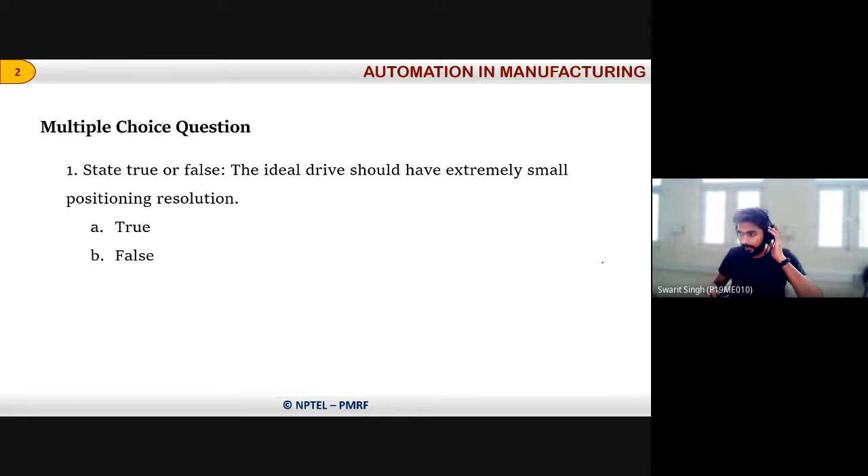Question answer round. The first question is on your screen now. It is a true or false statement. You have to decide whether the statement is true or false. The statement is: the ideal drive should have extremely small positioning resolution. Is it true or false? We are talking about an ideal drive. So what is required for an ideal drive? Should it have extremely small positioning resolution or a high positioning resolution?

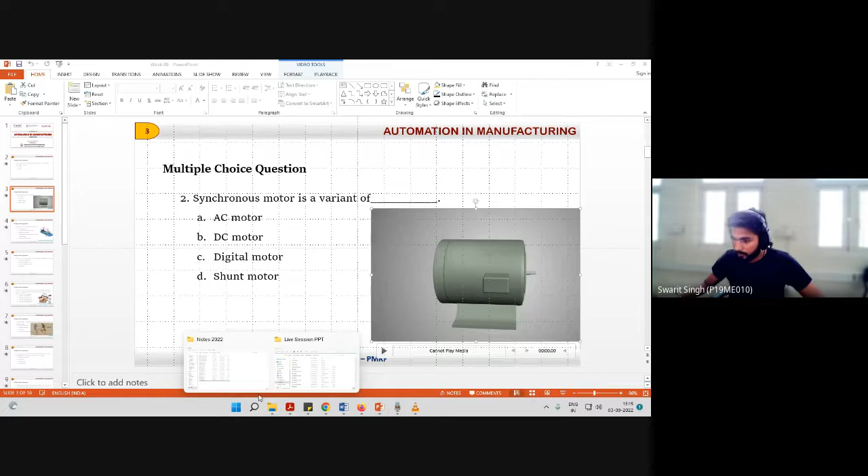Excuse me, just let me play this. Maybe it is not getting played. Just give me a second, because I have presented Windows, I think that's why it was not able to play that. I'm presenting the whole screen now. I hope my screen is visible to you all. Okay, come to it. Cannot play media. Okay, so let me show you the video directly. I'm sorry for this mismatch, I just tested it, it was working, but it's now not working.

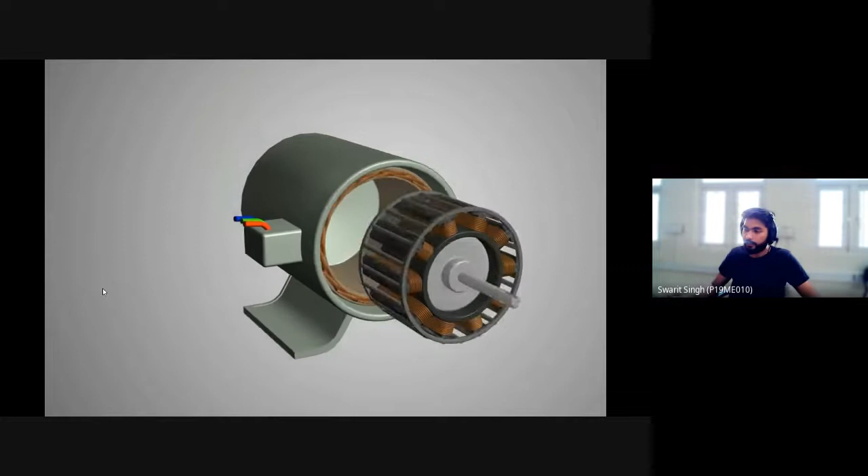Okay, so here it is showing how this synchronous motor has been built. As you already know, there is a stator and a rotor. The outer part is the stator, and inside it the rotor is fixed, placed there.

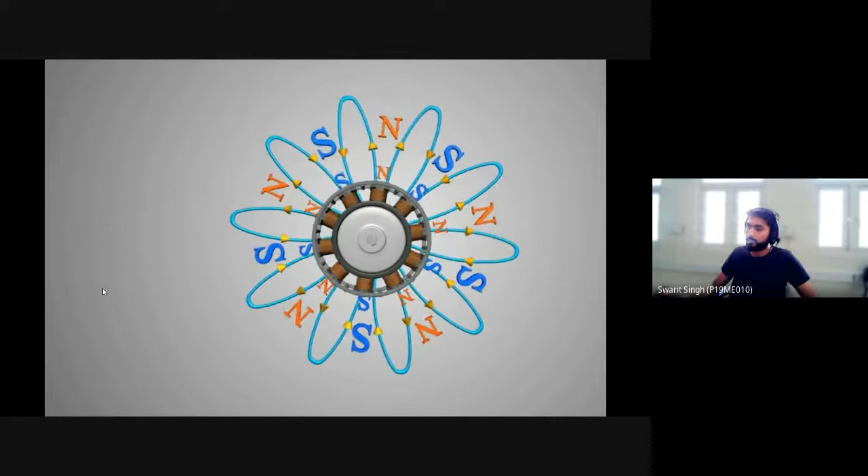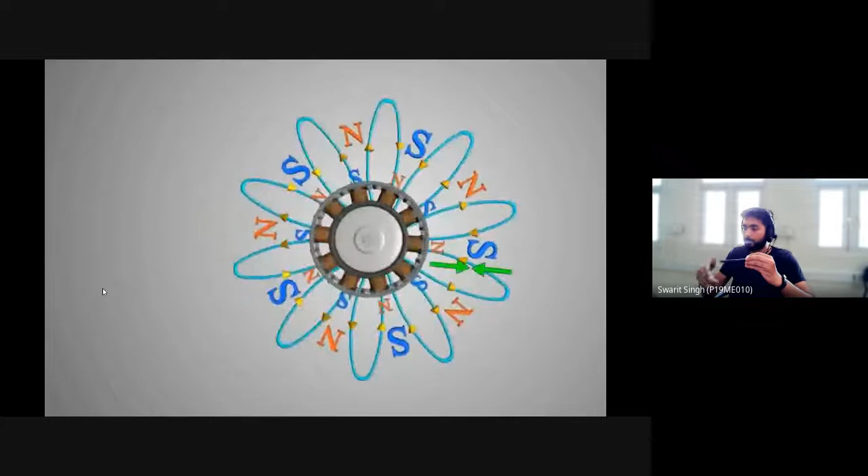So with the generation of this magnetic field, once both the north and south poles get in a synchronous mode, the rotation of the rotor will be in synchronization with the field generated by the stator.

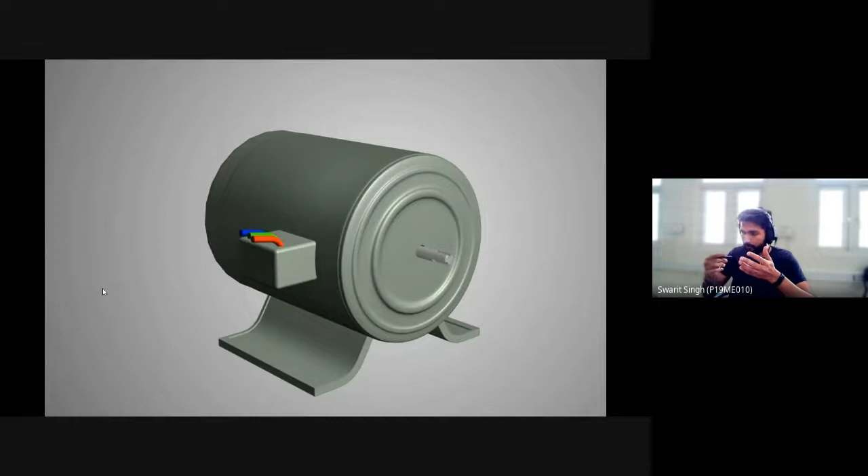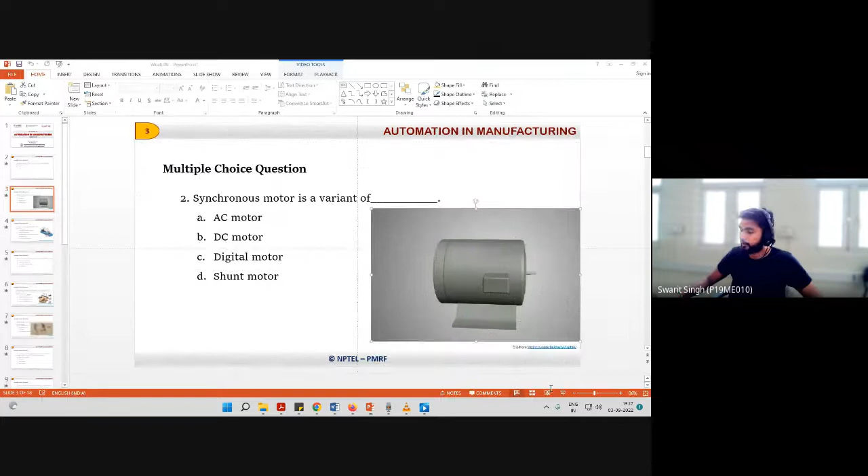So this is why this kind of AC motor we call a synchronous motor, because the frequency of rotation of the rotor of this synchronous motor is in sync with the frequency of the applied current, and the magnetic field that is generated in the stator.

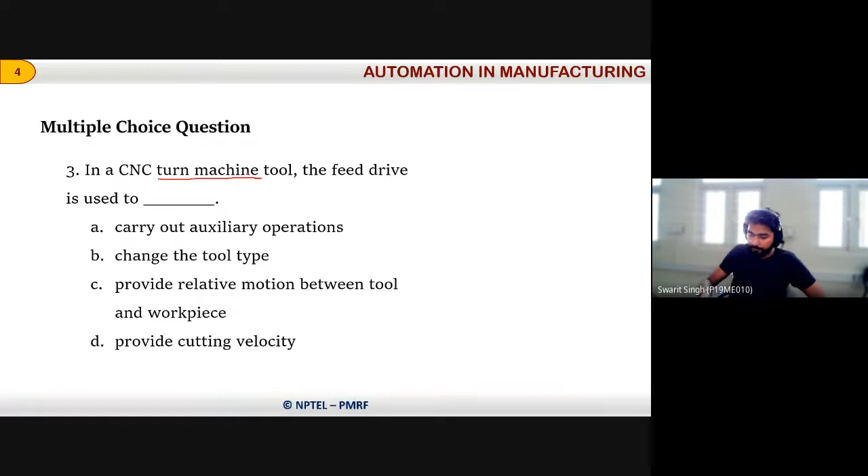So Chandar, Mukut, and T. Shankar Lal say C is the answer. Okay, so yes, C is the answer, because this feed drive is used for providing the relative motion between the tool and the workpiece.

As you all know, in a CNC lathe or any lathe, the lathe is meant mainly for turning operations, where the workpiece is fixed in the chuck or spindle of the lathe machine, and it is rotating on its axis. This workpiece keeps rotating, and the tool is mounted on the feed drive, which keeps moving, with movement defined by the operator manually or through code. That movement provides the relative motion between tool and workpiece, and due to that motion the cutting action is performed. So for that purpose this feed drive is used.

So you can see a sketch of a feed drive. There is a drive where the motor is placed, and a screw-nut-ball arrangement is there. This screw is attached with the shaft of the motor, so once the motor rotates, this also keeps rotating, because there is a teeth, a helix, so it keeps rotating, and then this nut, just like a simple screw and nut arrangement.

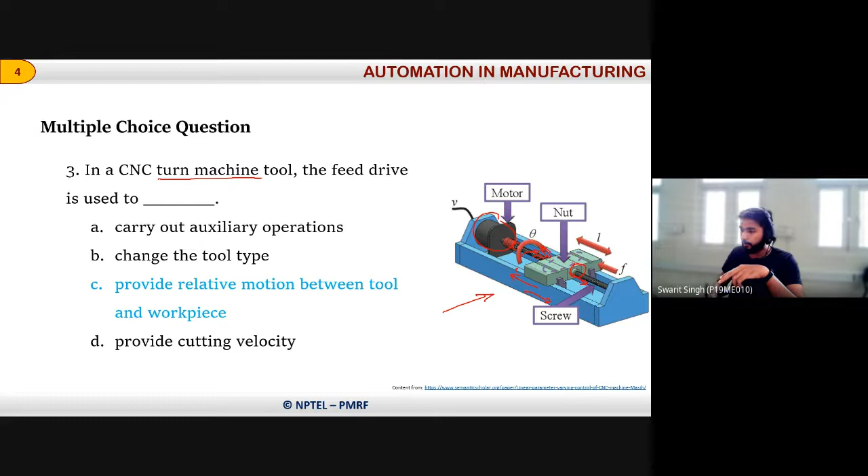Because of that rotation, inside this the rotation of this screw, the nut keeps moving either in this direction or in that direction, depending upon the direction of rotation of the screw. That provides the motion to the tool either in this direction or that direction. Or if we align this axis, like rotate it by 90 degrees, it will provide motion to the tool in this direction. So this feed drive is used for providing the relative motion between the workpiece and the tool.

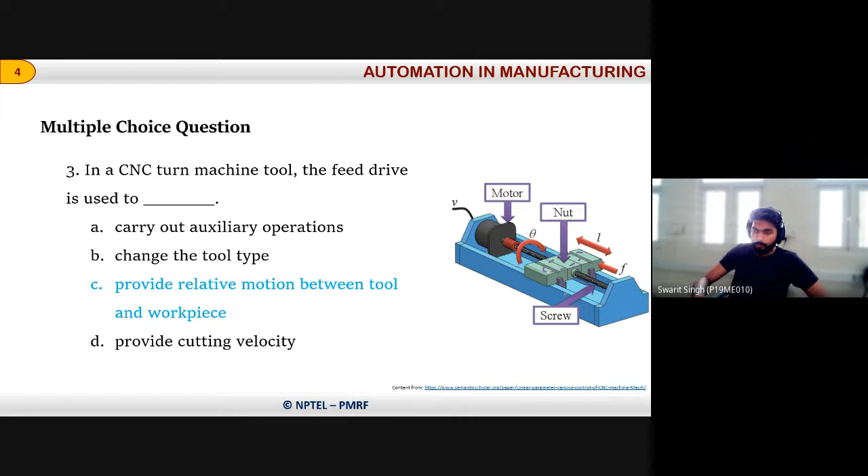We are moving to the next question. Question number 4 is on the screen now. It says electric drives are required in the automation of equipment for. We already have studied what are electric drives, so where these are required for imparting automation to the equipment. The options are: production operations, CMM based inspection, conveyor based transport, or all of these.

T Shankar Lal says the D option, that is all of these. Chandar Karma is also saying D. Yes, so the answer is D obviously, because in production operation, CMM based inspection, or conveyor based transport, we use electric drive for different purposes.

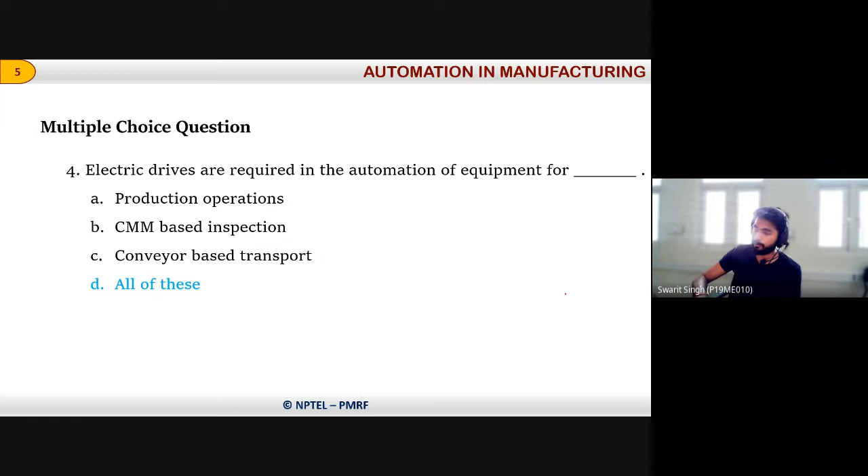Like for positioning, sometimes we use it for positioning the tool. Sometimes it is used like in a conveyor, we use it to transport the product from one end to another for transportation of the product. In CMM we use it to move the positioning of that probe. So for this kind of automation of equipment, in all of these mentioned scenarios, electric drives are required.

Now this is a very simple question which belongs to 12th class physics only. The question says, in the context of DC motors, when a current carrying conductor is placed in a magnetic field, it experiences a mechanical force whose direction is given by which rule? Taylor's left-hand rule, Fleming's left-hand rule, Faraday's right-hand rule, or Fleming's right-hand rule.

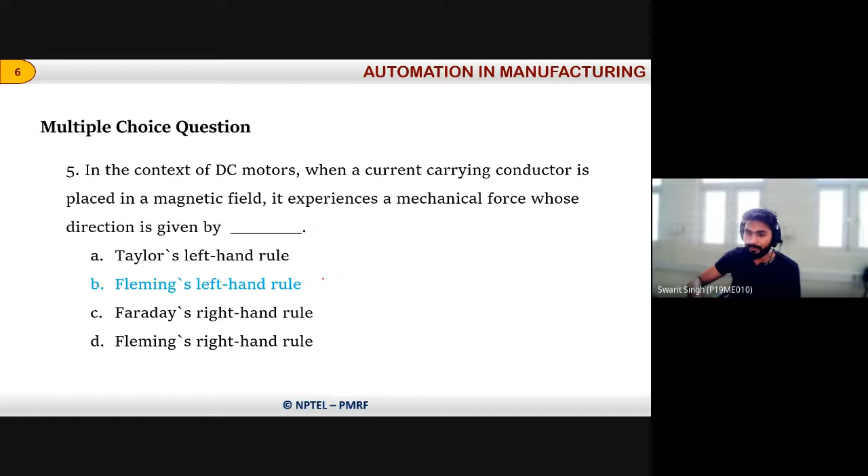Yes, you all have studied this. This is a very simple question, and the answer is Fleming's left-hand rule. Just for a recall, put your left hand like this. The thumb will show the direction of the mechanical force that will be observed. Then this finger shows, like in the figure, the magnetic field generated, and the middle finger shows the direction of the current. This rule is known as Fleming's left-hand rule.

We have studied it in detail, where we have the formula F equal to BIL sine theta. So in IBL sine theta, L sine theta is the positioning of the wire where the electric current is flowing. I is the current, B is the magnetic field, and F is the force experienced. All these are vector quantities. Because of that, with the help of Fleming's left-hand rule, we used to find any of these. If two or three variables are given, and one we require to find out, we use this formula.

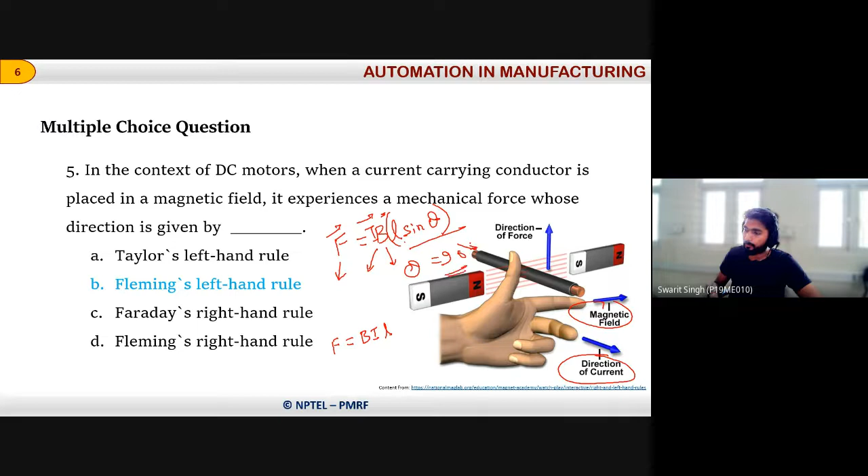Generally, the theta is equal to 90 degrees, so at a lower level we used to study this formula like F equal to BIL, because the angle between the magnetic field and the current carrying wire is 90 degrees. Because of that it becomes like this. I hope you all have got some more insights about this Fleming's left-hand rule. Now moving toward the next question.

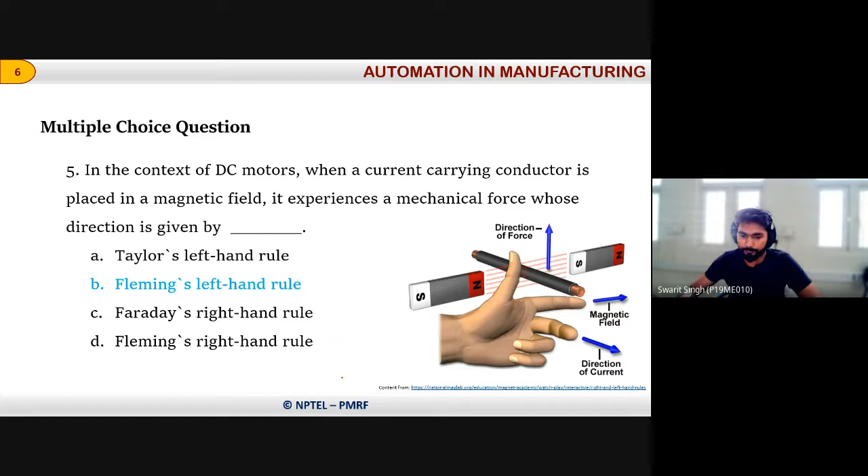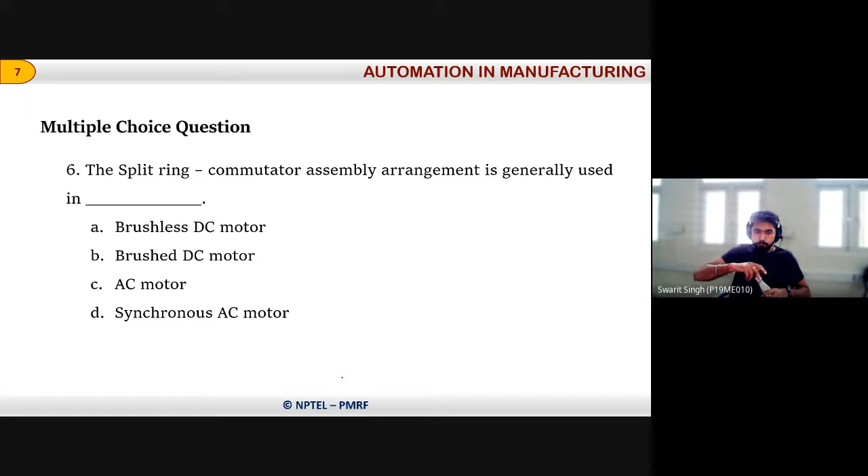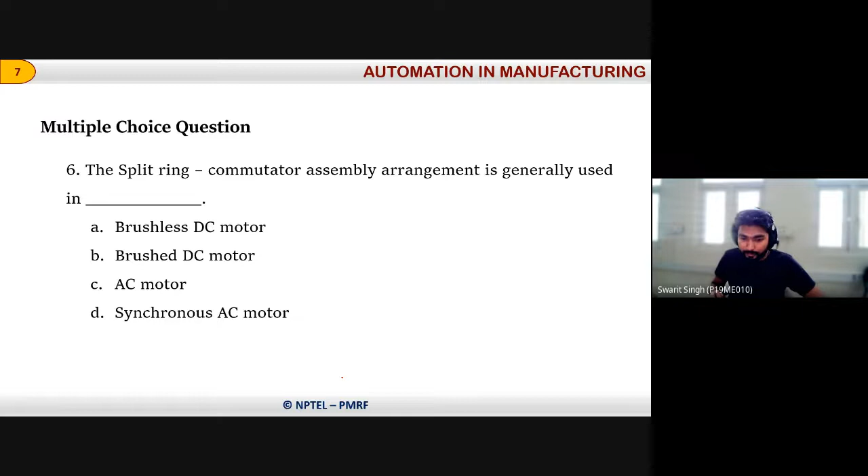The next question is on the screen now. It says the split ring commutator assembly arrangement is generally used in which kind of motor? The options are brushless DC motor... okay, you have given the answers already. So brushed DC motor is the answer.

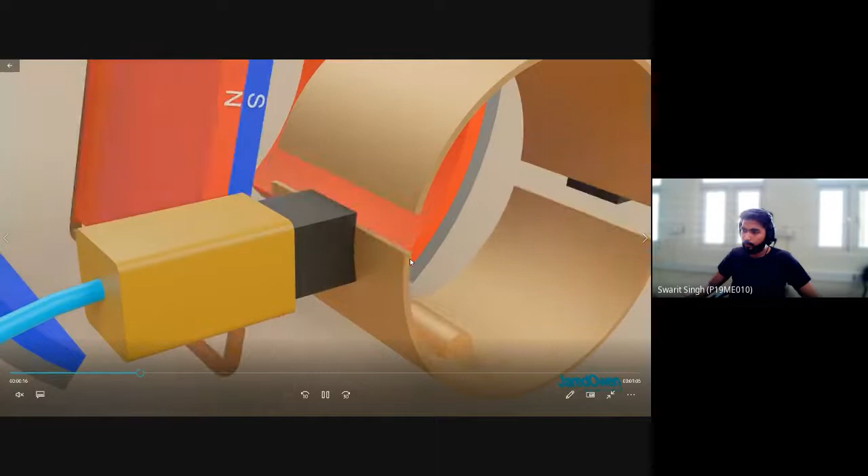Okay, so here you can see on the screen. These are the magnets, and this is the electrical wire which is carrying the current. Due to that current and the magnetic field that is there, a force is applied over it.

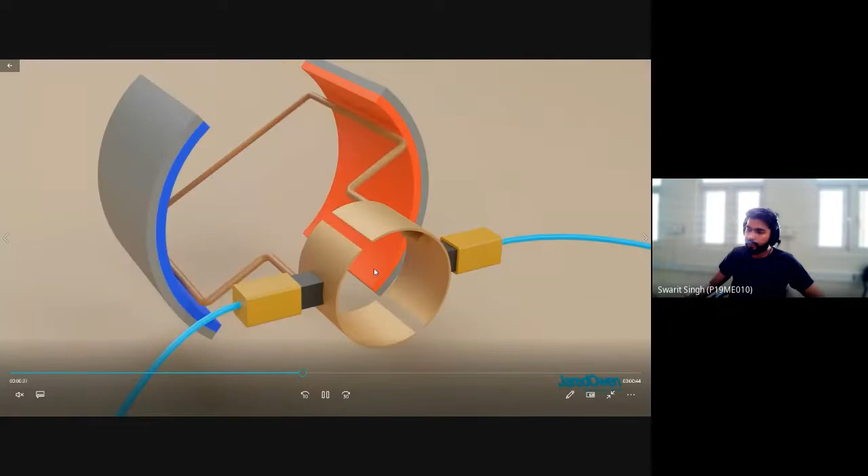On this wire, and since these wires are connected with this commutator, it keeps rotating. A shaft is attached to it to get the conversion of electrical energy into mechanical rotation. So these are the brushes, and these are the ring shape structures which are split rings. If we increase the number of split rings, the amount of torque we get is more.

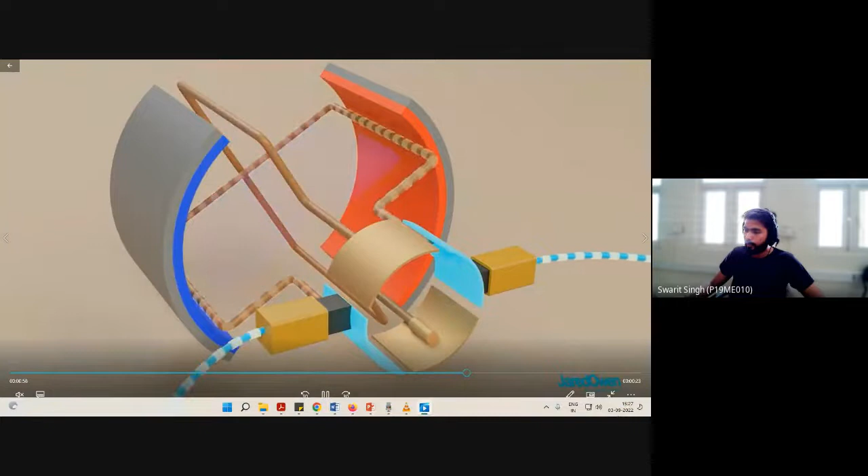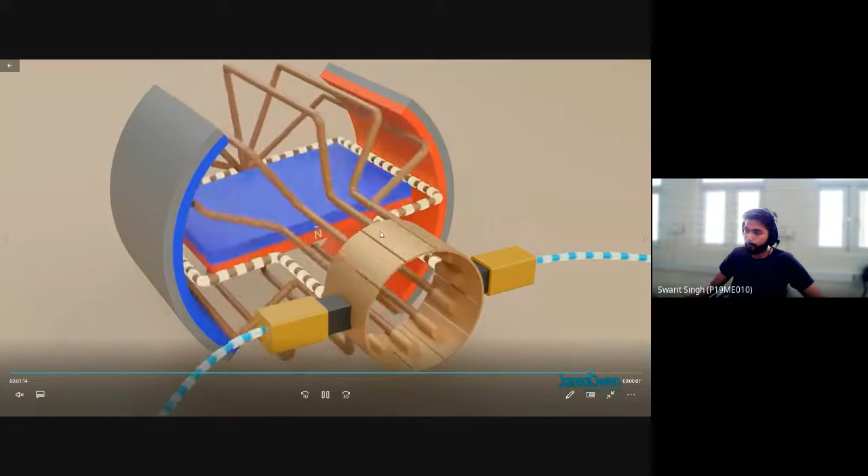So this is how the current is flowing. We apply DC power to this, and due to that the rotation of this current carrying conductor happens, and we get torque. This part is connected with the shaft, and on the shaft we get the mechanical energy.

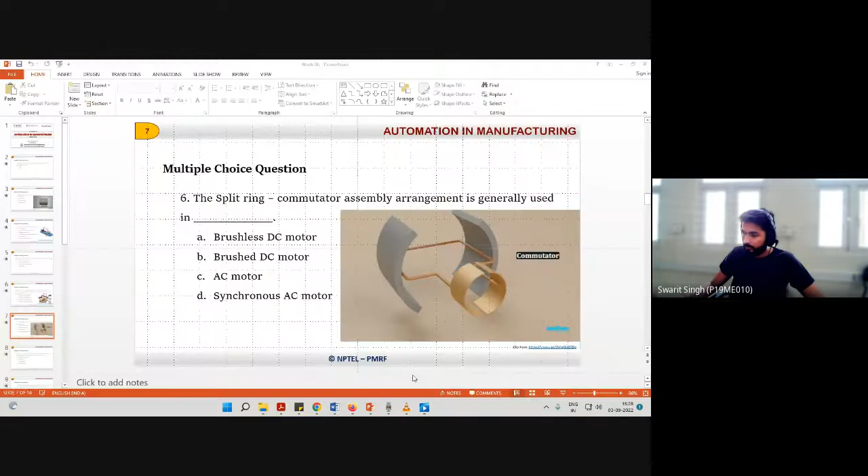Let's move towards the next question. I hope you have got some further insights into how DC motors look like and how the brushed DC motor works.

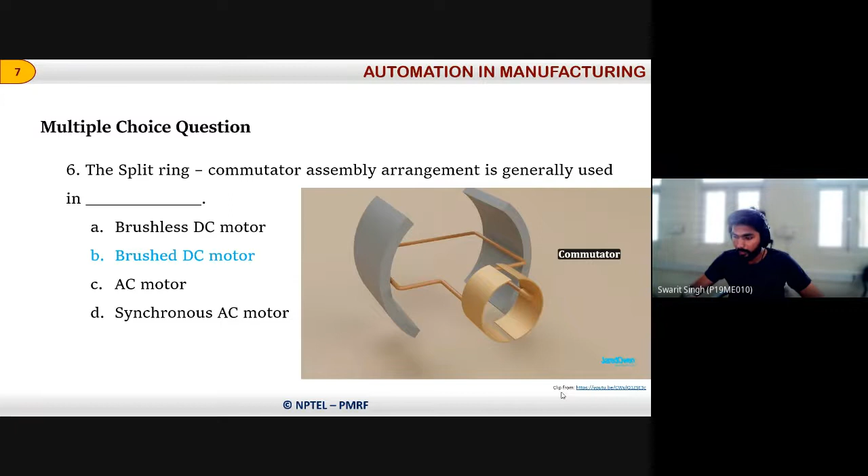So Bavo, in the video, was I not playing the voice? I think you're talking about that voice. Am I audible? Can somebody confirm my voice is audible? Okay, Abhishek, thank you.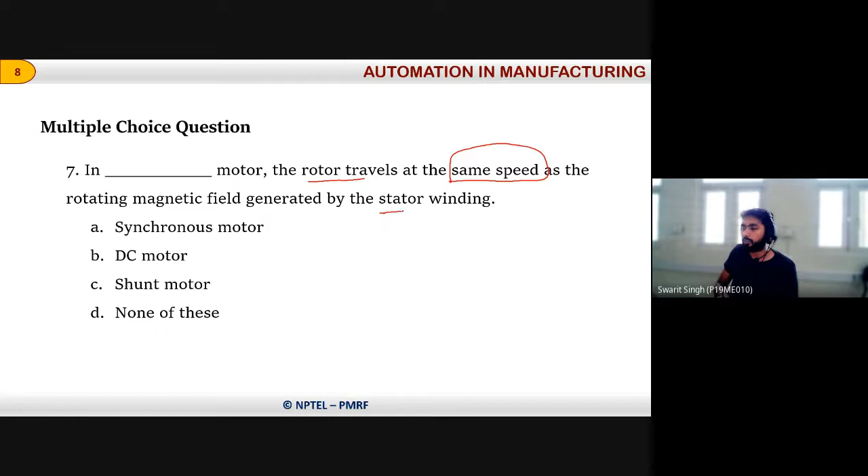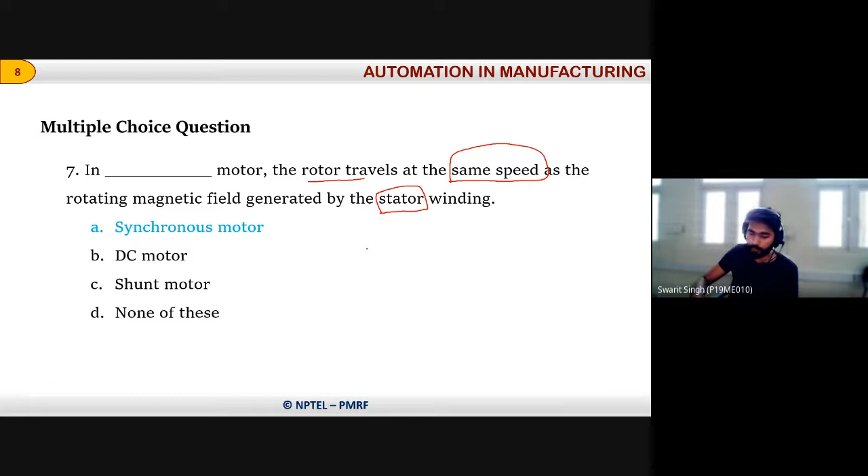Just before, we saw a video where if the speed of the rotor becomes equal to the speed of the magnetic field that is generated by the stator winding, it becomes a type of AC motor, and that is a synchronous motor only.

I'm moving to the next question. This is a numerical to solve. The question is: if the synchronous speed of an induction motor is 800 RPM, and the actual speed is noted at 780 RPM, then what is the slip in the motor, in percentage?

I hope you all have studied this part in the course and gone through the formula and concept of slip. We have to calculate the percentage of slip observed when the induction motor is running at a synchronous speed of 800 RPM and the actual noted speed is only 780 RPM, meaning we have lost 20 RPM of speed.

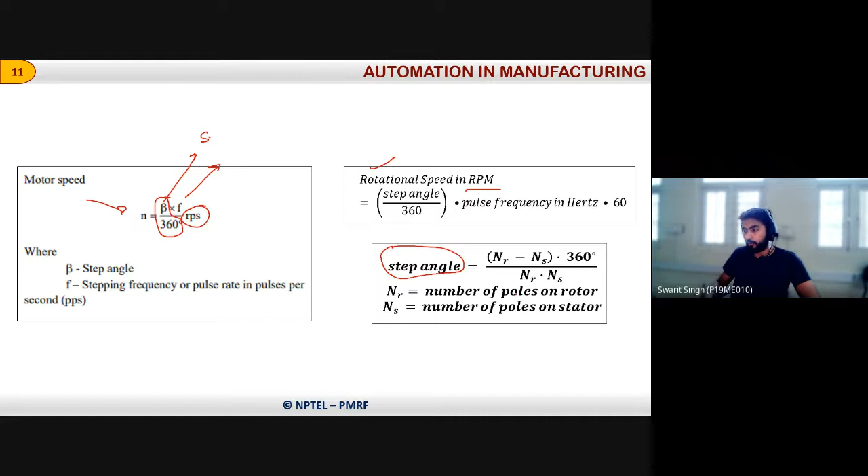Using all these concepts, we are now going to solve a comprehensive question. The first question is on the screen, and the answer is also there - no issue, just solve it and check whether you are getting the answer or not.

The question is: a stepper motor has a step angle of 2.5 degrees. Calculate the number of steps required for the shaft to make 25 revolutions. Since we are running out of time, I'm going to just solve the question for you while we keep discussing the concept.

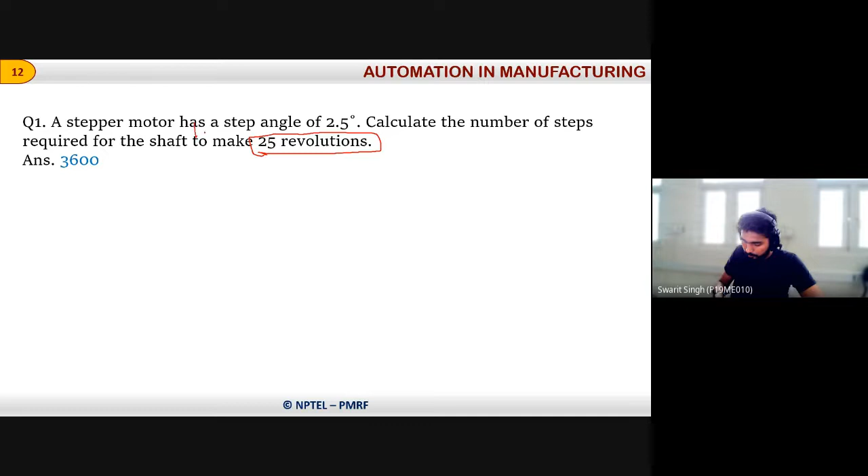So the stepper motor has a step angle of 2.5 degrees - in one step it covers 2.5 degrees. So how many steps will be required to cover one complete revolution? That's 360 degrees, right? So for 360 degrees, how many steps? We'll divide it by 2.5 degrees. What is the answer?

So this is 144, right? And this 144 is the number of steps it has taken. So if in one revolution it is taking 144 steps, then how many steps will it take for 25 revolutions? You simply multiply 144 into 25, and the answer becomes 3600. So this is basically based on a very simple mathematics calculation.

We just have to follow the concept. I hope you all are able to get this answer. If someone in the class gets some other answer, please let me know.

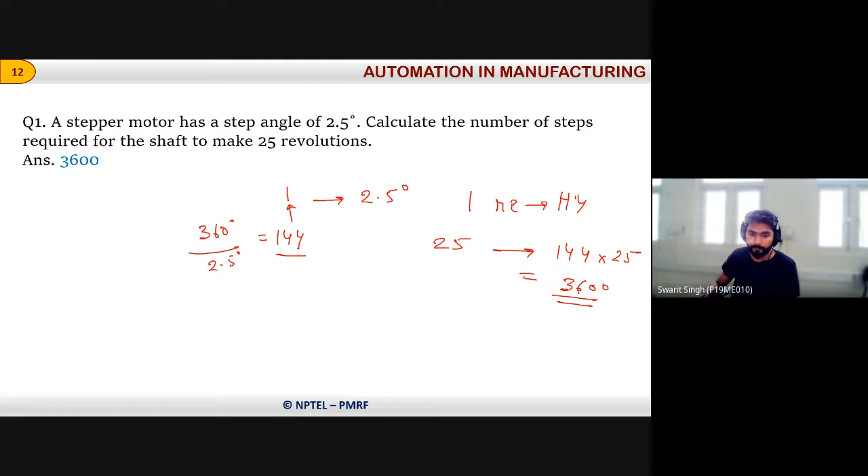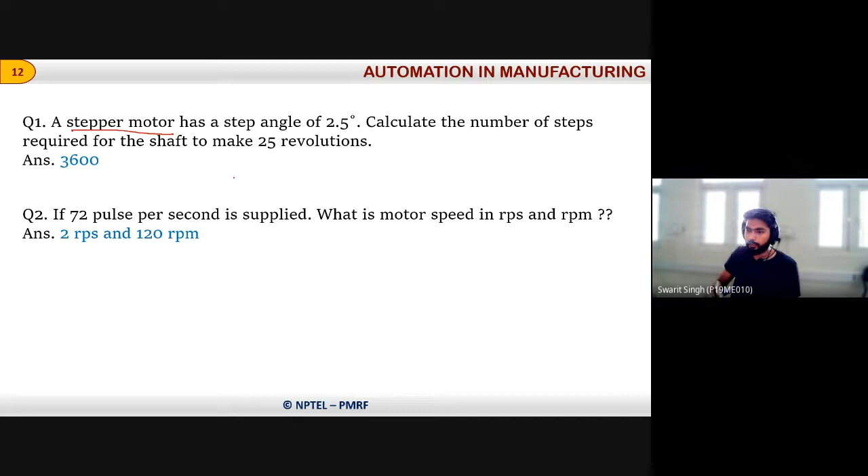Now moving to the next question, which is connected with this only. The question says, if 72 pulses per second is supplied to this same stepper motor, what will be the motor speed in RPS and RPM?

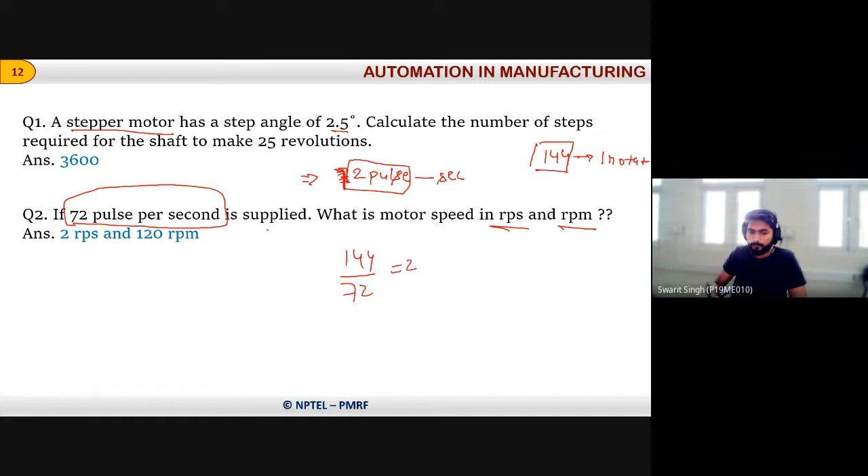Yes, yes. Someone has given an answer in RPM. And for seconds, we do not require this. So this is the answer in RPS. And if we convert for minutes, we have to multiply it by 60, 2 into 60, it will become 120 RPM. Any confusion in this?

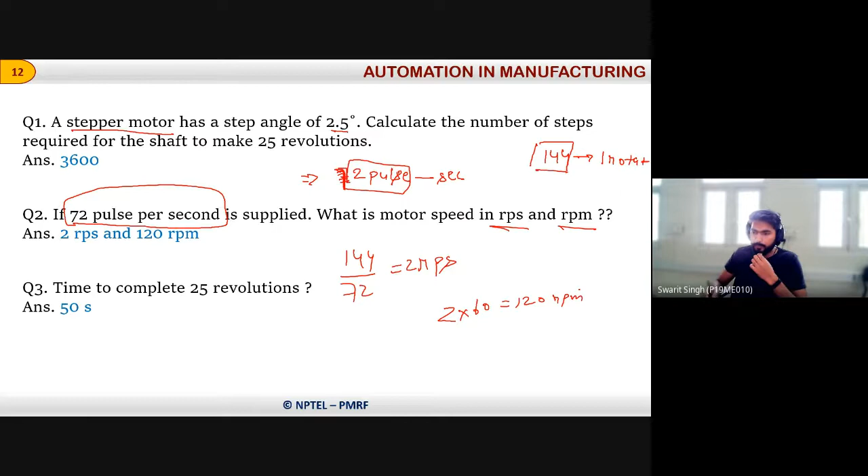Okay, so we'll move to the next question. What is the time required to complete 25 revolutions, in continuation with this same question? This 25 revolutions will be completed in how much time?

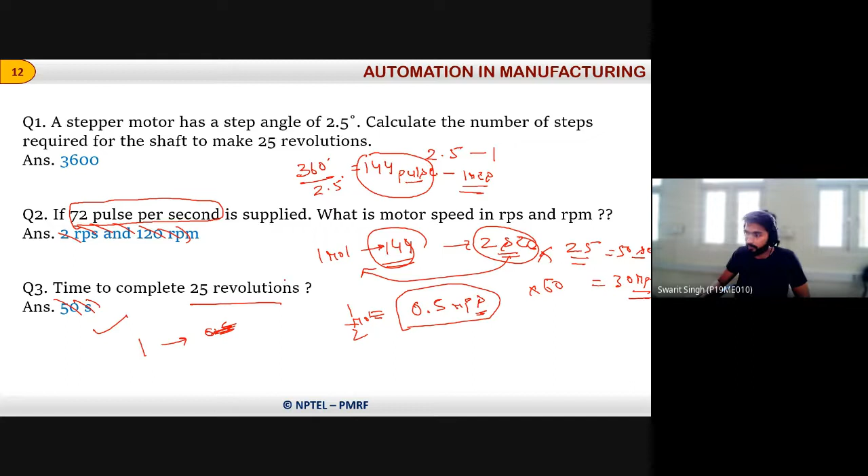I hope you got the correct answers now, and I'm sorry for this mismatch. I just copied it from somewhere without solving it myself, that was my mistake, I really apologize for that. I hope the concept is clear to you all now.

Moving to the next question, question number 10 is on the screen now. It is again a multiple choice question. It says, in a variable reluctance stepper motor, the rotor is made of which material?

Yes, so the answer is ferromagnetic material. Okay, so this is a direct question from the slide only.

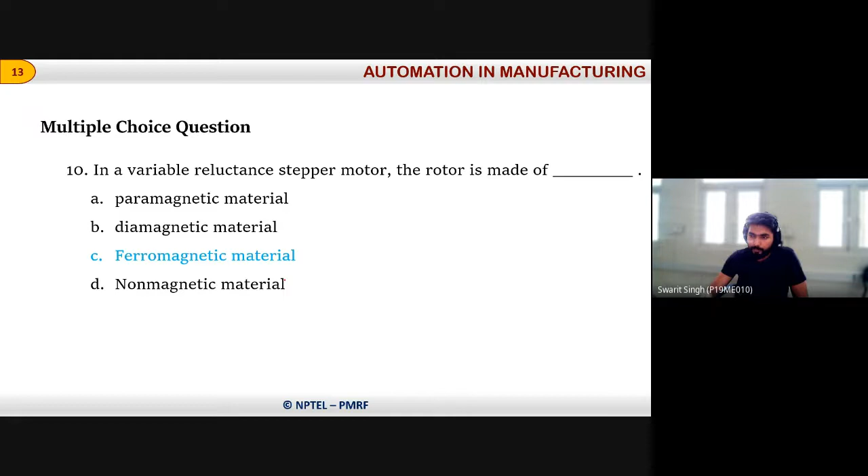Now I'm going to take some questions from the discussion forum that were asked there. Snehash is asking this question, saying that he is confused about this negative voltage, regarding the comparator circuit that was discussed in the class.

So from here we are supplying an analog input of 2.5 volts. For 2.5 volts of analog input, we are comparing it with 1 volt, 2 volt, 3 volt and 4 volt, like that.

And what is the situation if this value is greater? If the analog input is greater, the comparator will give us value 1, and if this value will be less than these values, it will show the value 0.

So here, we are applying 1 volt to this positive terminal, and 2.5 volt is applied to the negative terminal. So he is confused with this term of terminal, saying that at the negative terminal it is minus 2.5. I don't think this should be a confusion. This is a terminal only, this is not a negative voltage.

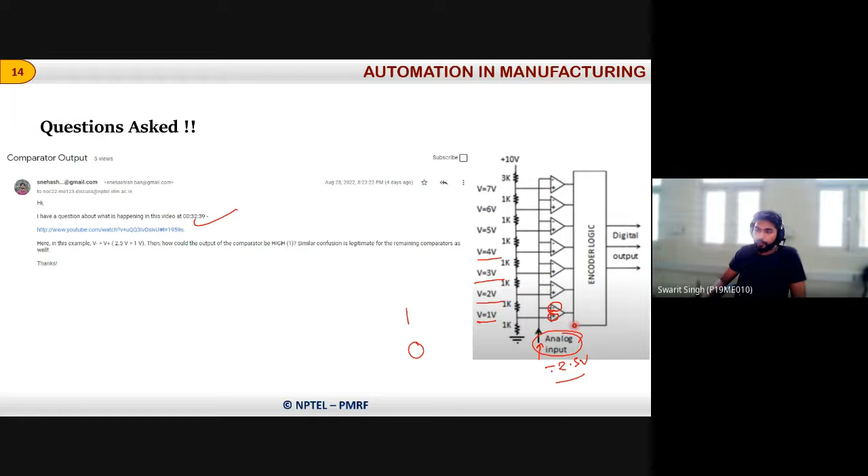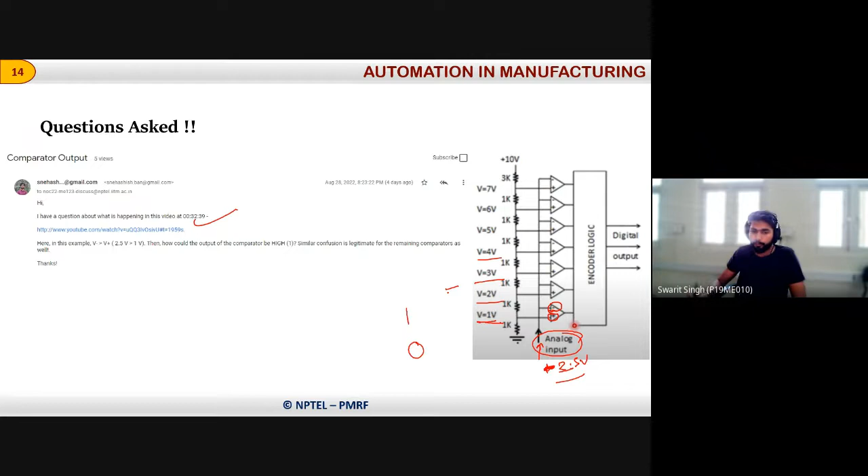That's why 1 voltage is less than 2.5 volt. We are not considering this terminal as a sign. So the discussion in the class is correct, and you may again go through it for further information, thoroughly.

The next question was asked by Mr. Adik. He said that sir, normally every signal conditioning device gives output in current change because there is possibility of change in voltage. Also tell me what type of output is provided by sensors - analog, digital, or both. As we already have studied, there may be analog sensors or digital sensors.

Both types of signal can be provided from the sensors, and that's why we require signal conditioning and conversion devices. Converters are required to supply those values to the microcontroller or microprocessor, because the microprocessor works only on digital signals.

So the answer is mentioned on the portal. The main purpose of using a signal conditioning device is to further process the signals and data from the sensors, so that the proper signals and data can be fed to the microprocessor, so that necessary intended action can be carried out by the microprocessor. Sensors usually provide output signal in analog form, except for digital sensors, where necessary components convert analog signal to digital form for integration along with analog sensors.

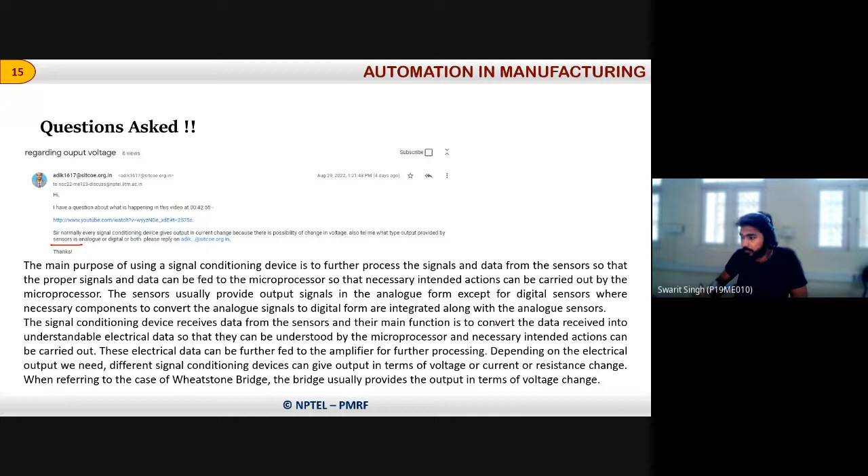The signal conditioning device receives data from the sensors, and its main function is to convert the data received into understandable electrical data, so that it can be understood by the microprocessor and necessary intended action can be carried out. This is already there in the portal, you can read it from there if you have any confusion. I don't think the people who are in the class have this kind of confusion.

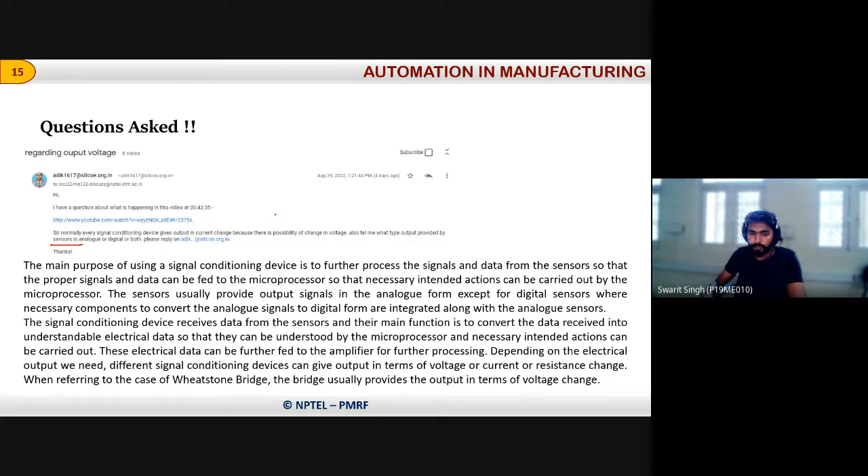Next question is asked by Rajesh. I think Rajesh hasn't joined the class today, maybe some examinations are going on or something like that. But we'll take his question. He asked about which operation is used in priority encoders.

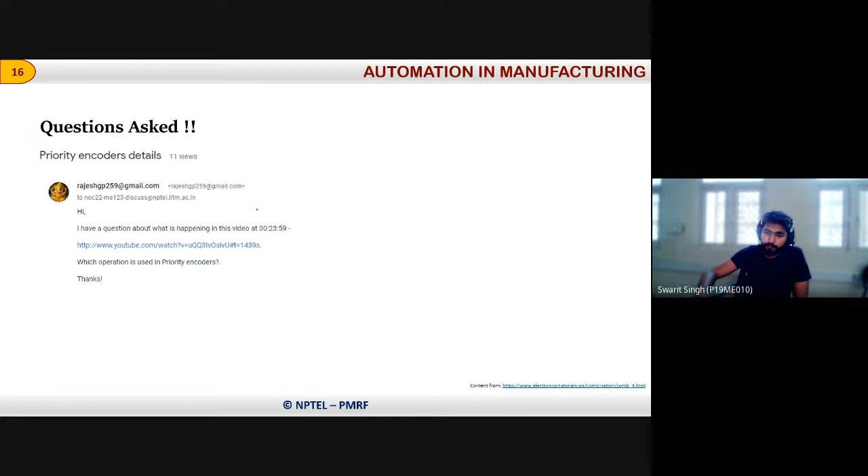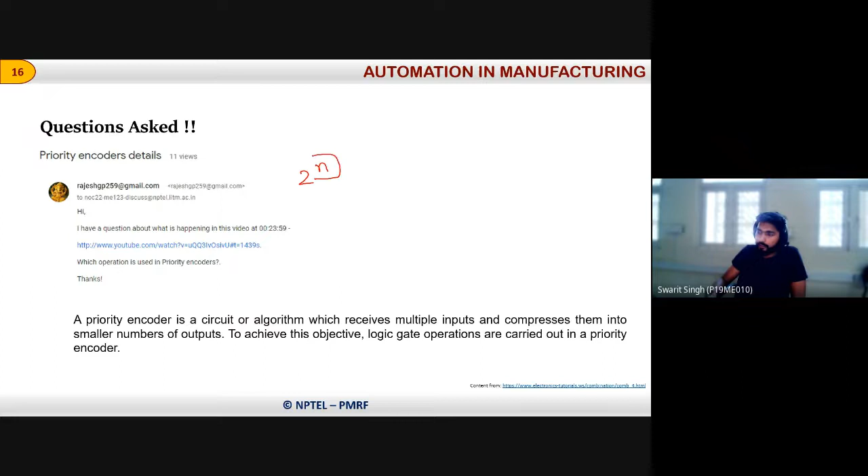We have already studied about priority encoders last week. Priority encoders are a circuit or algorithm which receives multiple inputs and compresses them into a smaller number of outputs. We have studied about 2 to the power n, where n is the required number of outputs. So this 2 to the power n is the number of inputs.

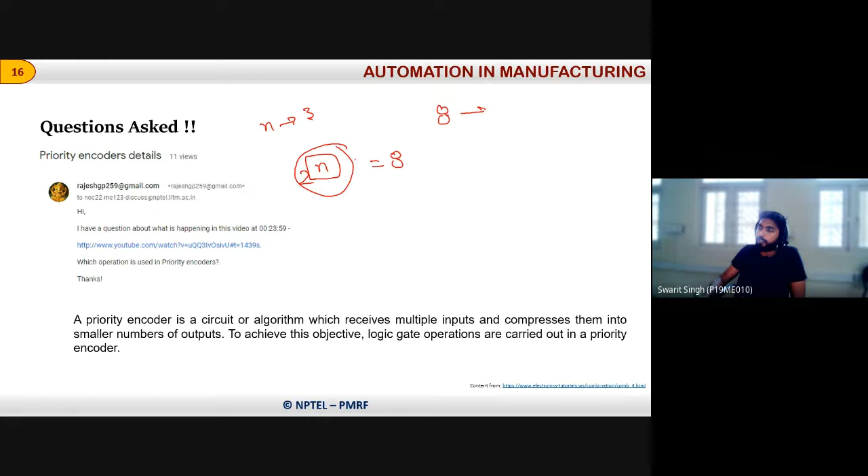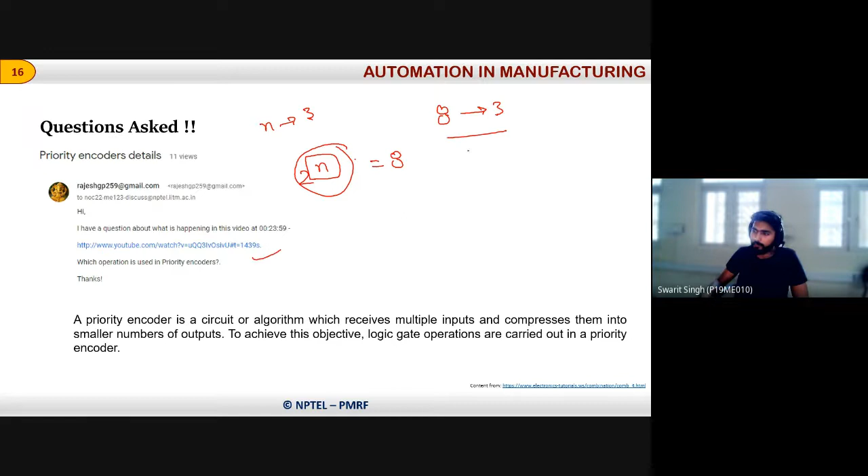So if n is equal to 3, it is 8. We have studied in the class about the 8 to 3 priority encoder. At this point of time in the video, this 8 to 3 priority encoder was discussed in the class.

For more about how priority encoders work, in this 8 to 3 encoder we use some logical gate operations. This is a sample, not the actual one that was discussed in the class - this is a different logical operation that we have applied for the same kind of encoder.

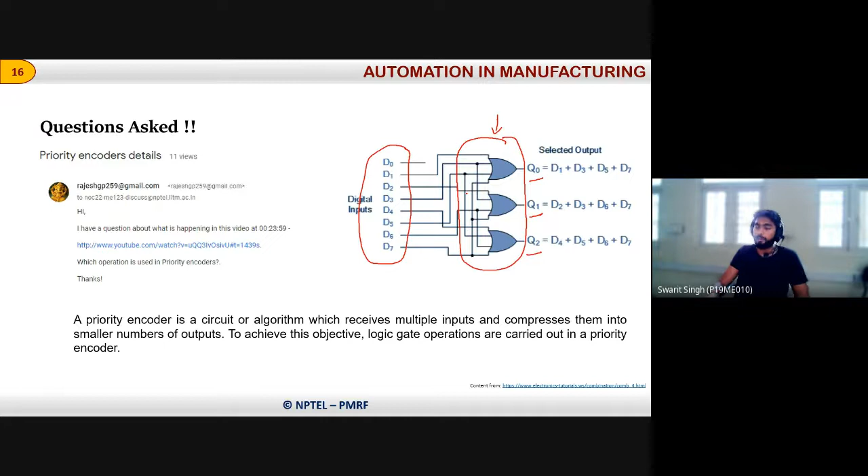Okay, so this has 8 inputs and it is compressed into 3 outputs. With the help of this logic, the data is compressed, the input signals are compressed into three outputs. So priority encoders employ this gating system, using logical gates to convert a large number of data inputs into a smaller number of outputs.

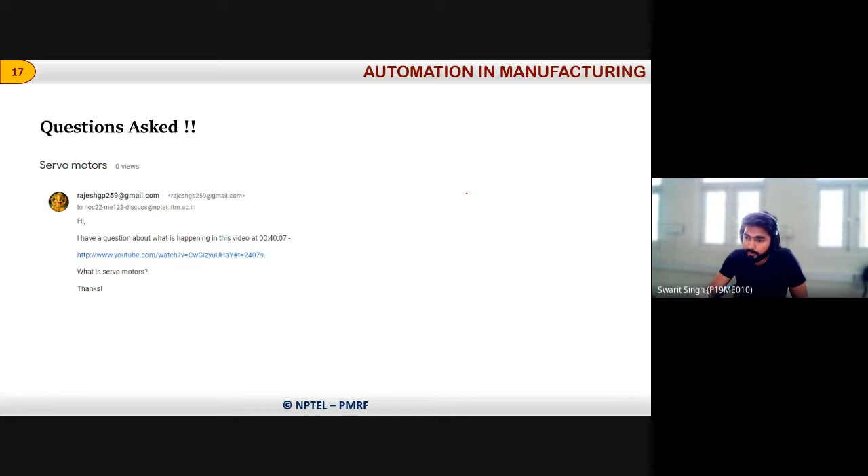This question is also asked by Rajesh. He wanted to know about servo motors. So yeah, let's discuss servo motors.

A servo motor is nothing but a motor of any type, like AC or DC motors that we already have studied. So in addition to that motor, which may be AC or DC, there is a feedback circuit joined with it. This feedback circuit makes the servo motor very important, because servo motors are utilized for positioning requirements.

So it is an option against the stepper motor that we have already discussed. In place of stepper motors, for very precise positioning, we use servo motors.

In a servo motor, there is an encoder attached with the motor itself, which is used to compare the output — what is the required output and what is the actual produced output. Based on that, it provides feedback to the controller, and the controller changes the parameter required for correct output. It provides a signal to the driver, and the driver drives the motor.

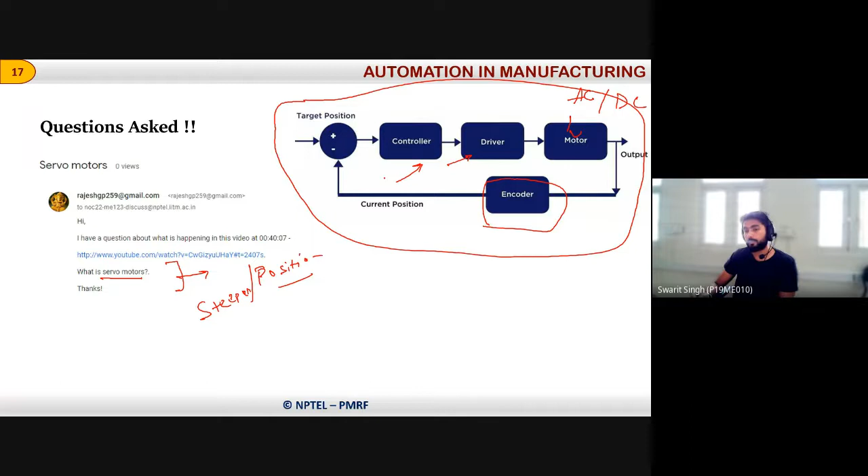So here I have a short clip, but I think it will not play here. Let me try once to see if it plays. No, it is not playing, so I'll just show you an external window.

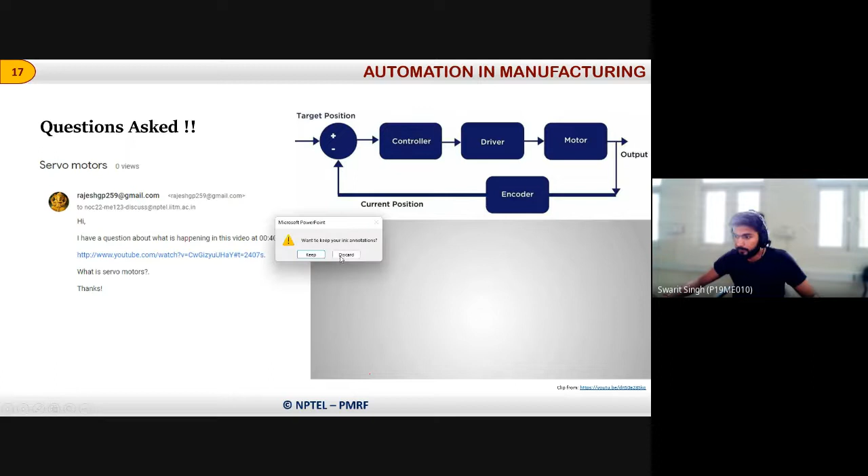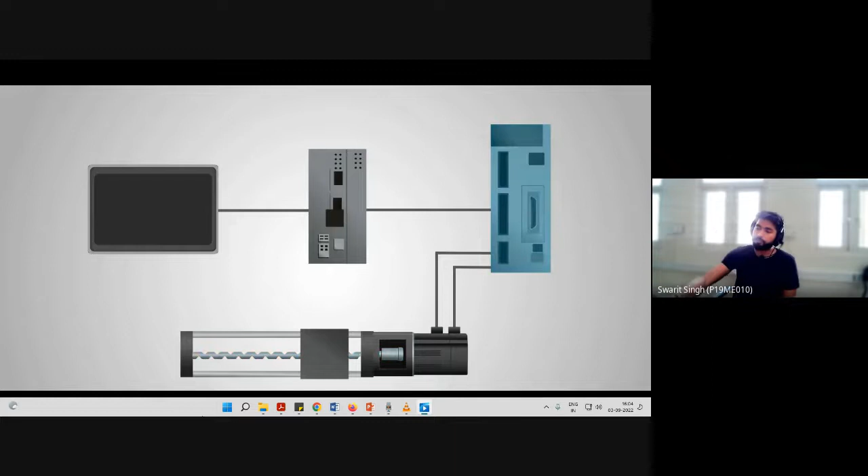Yeah, so these are the components of a servo motor — there is a controller, a driver, an encoder, and the servo motor itself. This is the positioning where we require the positioning. On supplying power, this positioning occurs with the rotation of the shaft of the servo motor.

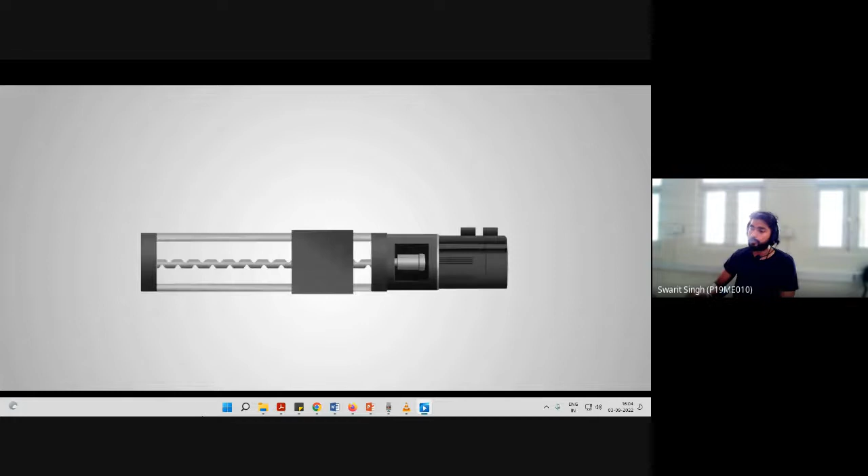The correct placement or correct output is then identified by the encoder attached to the motor. It provides feedback to the controller, and accordingly the controller controls the motion, controlling the required power supplied to the servo motor.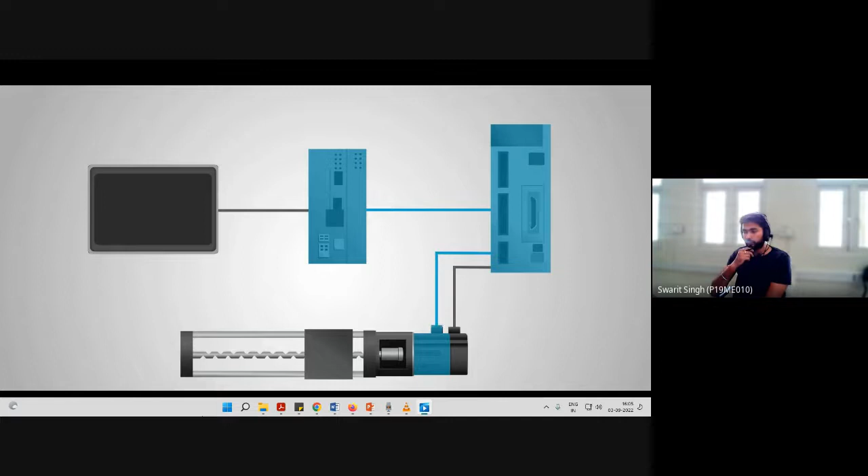So there is a controller and then a driver again. This supplies a feedback, making a feedback loop. Based on this feedback from the encoder, further signals are transferred to the motor, and accordingly it is used for positioning of components.

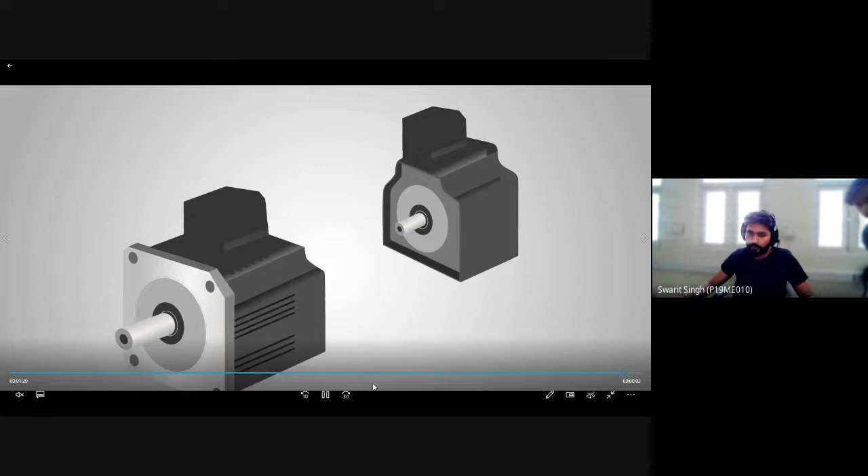So this servo motor is joined in two parts — one is the motor itself, and another is the encoder.